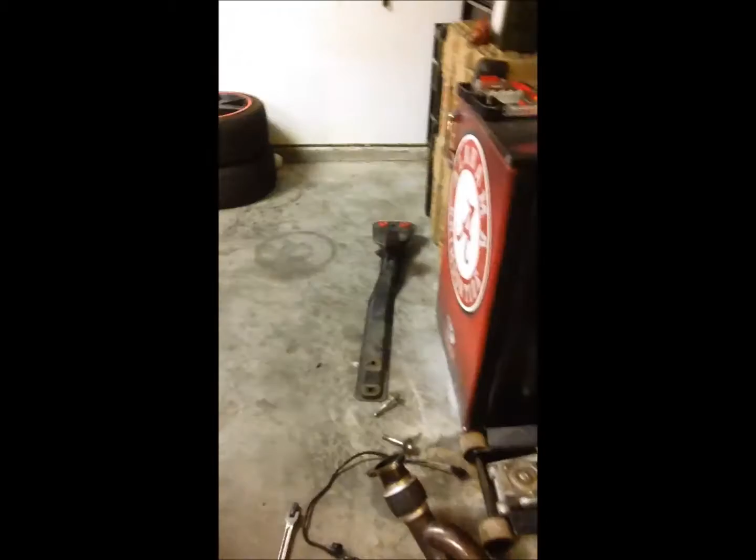This is assuming you already know how to remove that piece and your headers. I'm going to show you step by step what bolts to take out, what order, what tools you need, and this is all based on you doing it flying solo with no assistance.

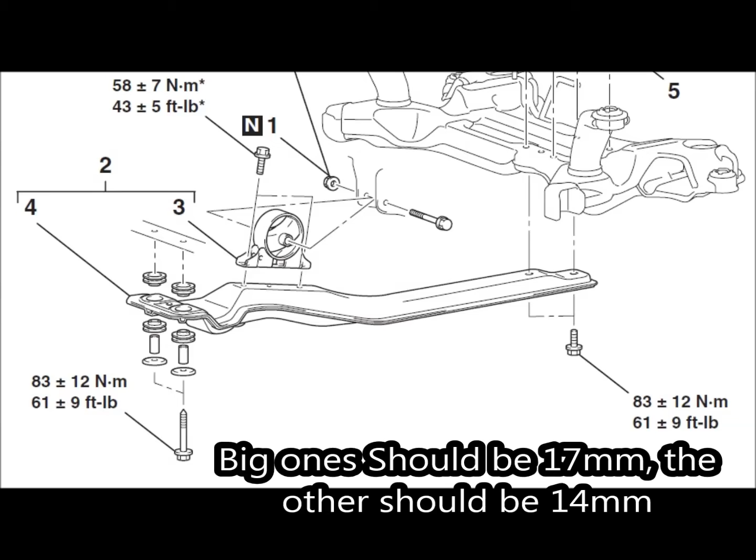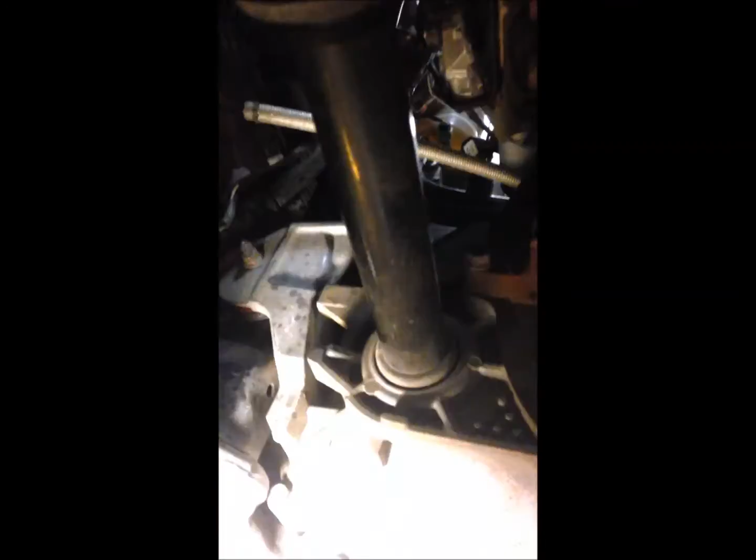So from this angle, my feet are pointed along with the driver's side hub assembly. And there's your ATX, oil pan, drive shaft, and your rear motor mount.

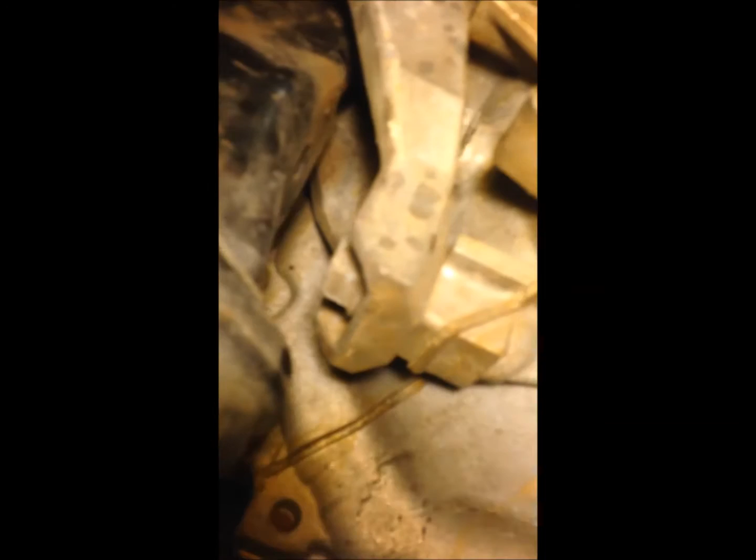Now the biggest pain is that guy right there. That bolt, because of the clearance, it's hard to get it out. Also, right there, back in there, there's a bolt that goes in there. That's also hard to get out.

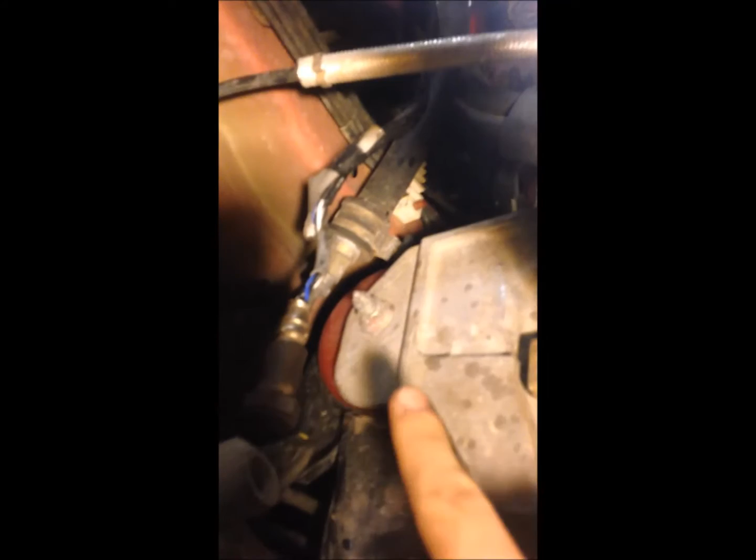So what we're going to do, we're going to remove that nut bolt combo, and with our other hand, we're going to push the transaxle, swinging it forward, because we already have our front mount removed.

Since we still have the transmission mount and the passenger side hydraulic mount installed, the engine will hang. It's not going to sag at all. It's actually pretty stout. I'll show you how to do that in a sec.

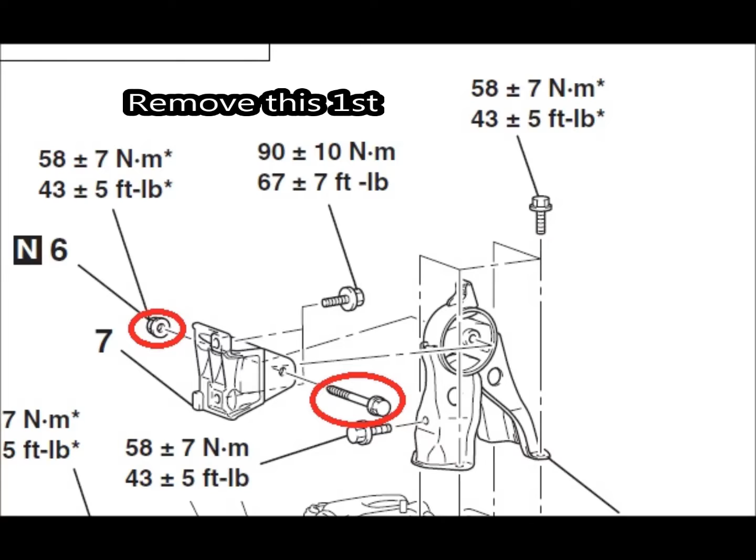So the motor mount bolt has been pulled out. I'm now going to show you how freely this setup swings.

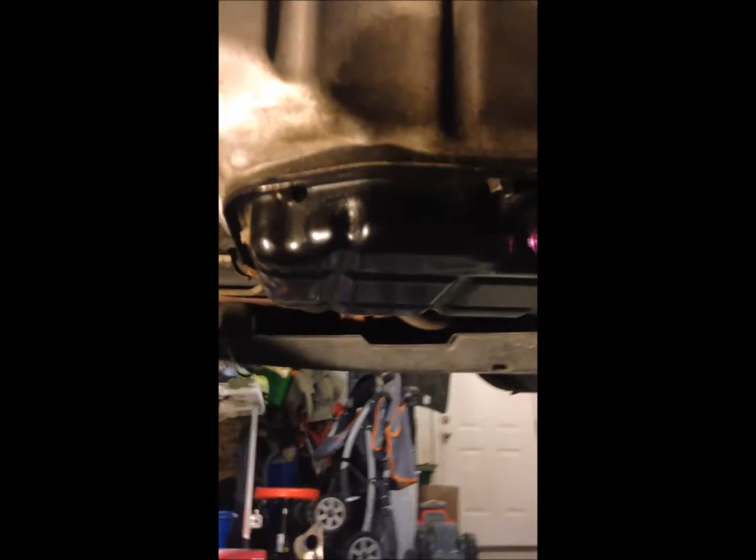Here's a better angle. A lot of movement, right?

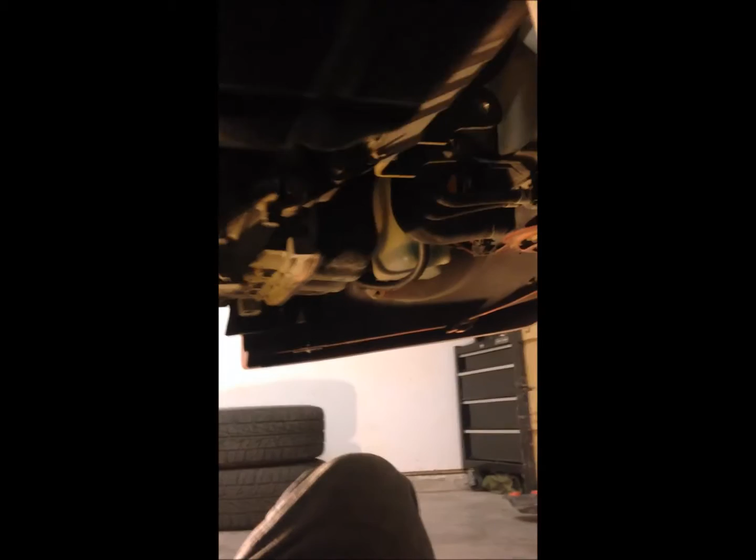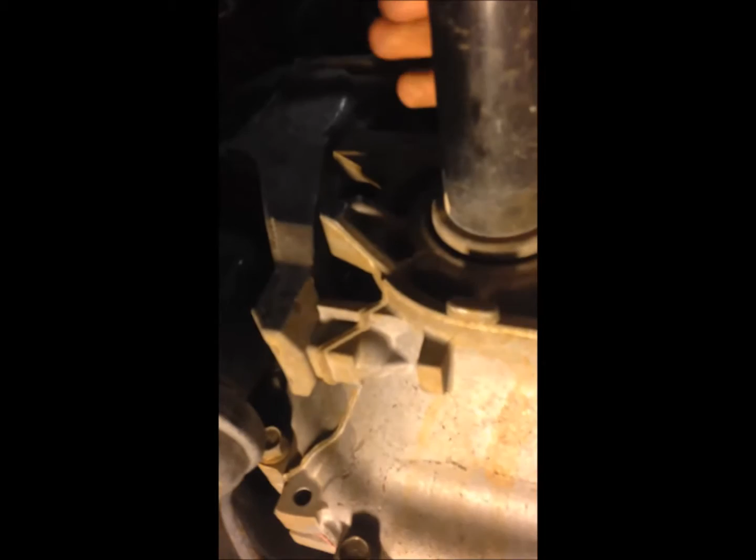So the theory behind pulling out that rear mount. Remember that bolt I was showing you is a pain? See all that room we got now? We pull it aside. You can hold it back, working a wrench back and forth, and pull it out.

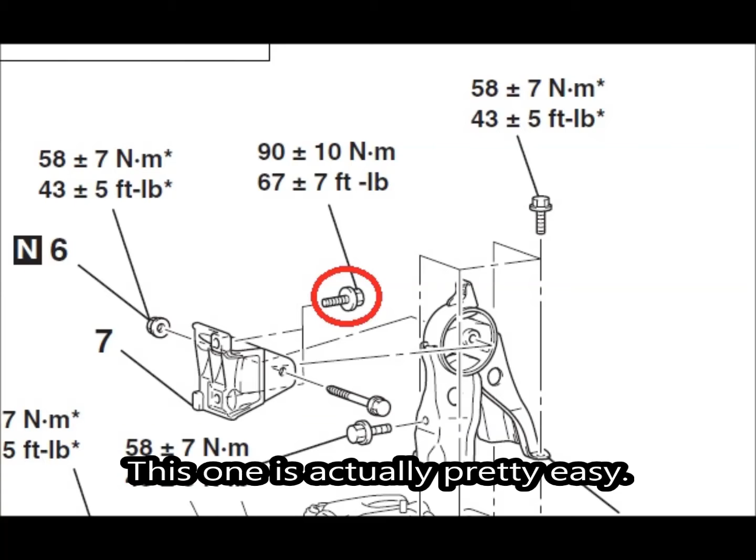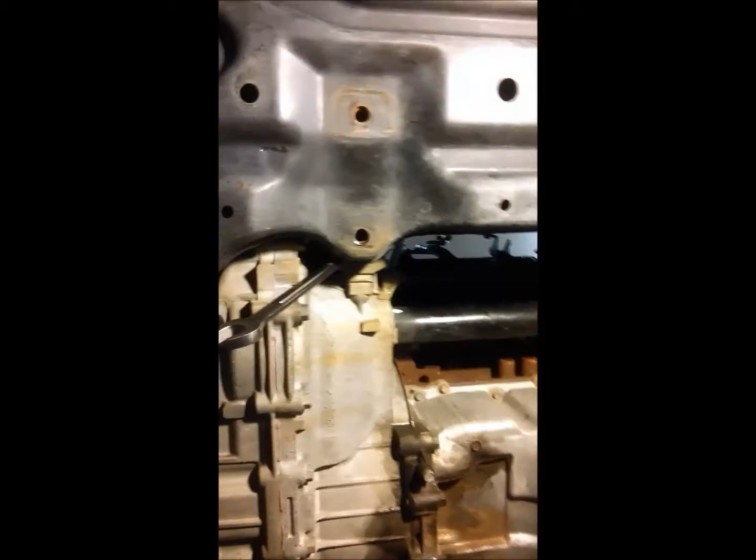I hope you can see what's going on here. There's my wrench, and there's the bolt we're trying to get to. Grab my half shaft, use your back muscles, and you're pulling it out and away.

That one's really stuck in there. Get you a cheater wrench. I've broken the torque on it.

Let's see if I can just work it out now.

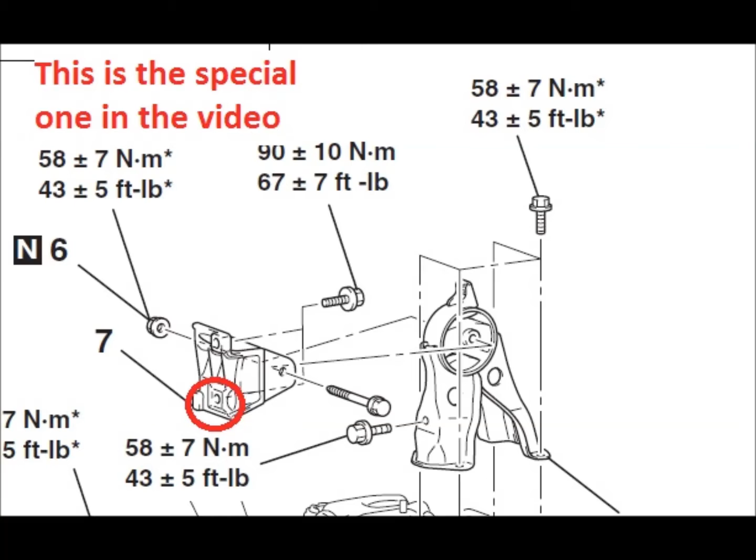Right now, there's no more room to pull it out. So all I'm doing is rocking the engine, giving me room to work it out. It's never going to come all the way out. When it comes time to pull this entire back member that bolts onto the transmission, that bolt is going to drop with it. It will not be fully removed.

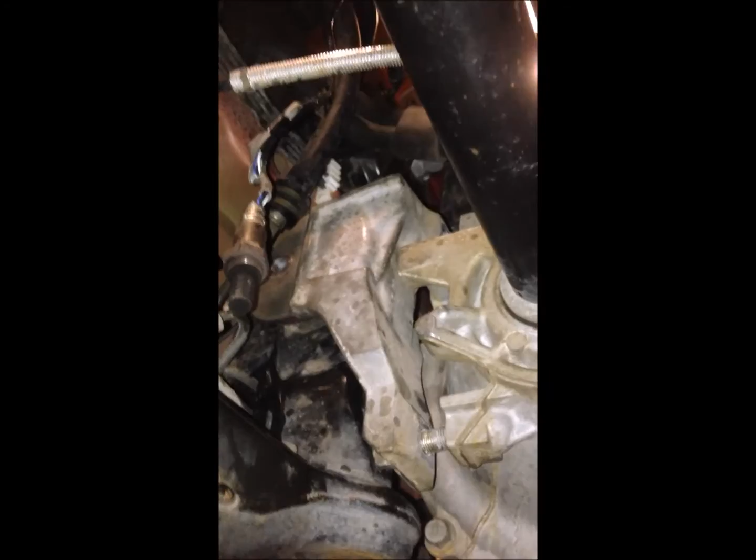Alright, so I took out that top bolt that I just showed you a picture of. This bolt is not fully removed. It's just chilling with that member. So I'm going to attempt to show you what to do. I only have two hands, one's got to hold the camera, so let's see how this goes.

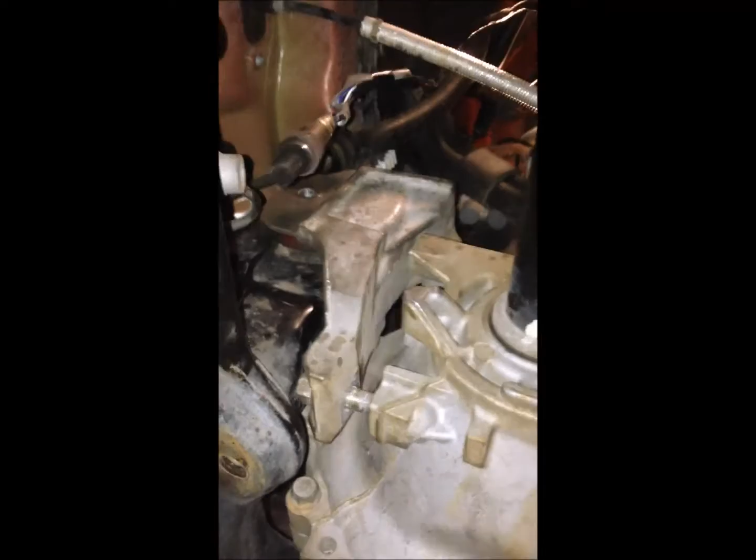As I'm using my left hand, I'm bracing it against the K-frame, and I'm just pretty much pulling the engine. See how that works? So try and get this camera so everyone can see, because this is the biggest pain in the butt.

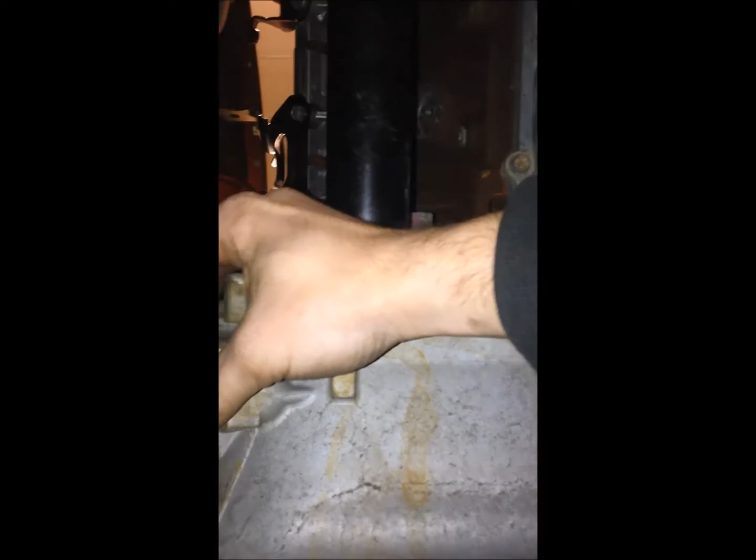All I'm doing, I don't know if you can see that or not, but all I'm doing is just working her up. I curl it with the left arm and just work her up out of the way. There you go.

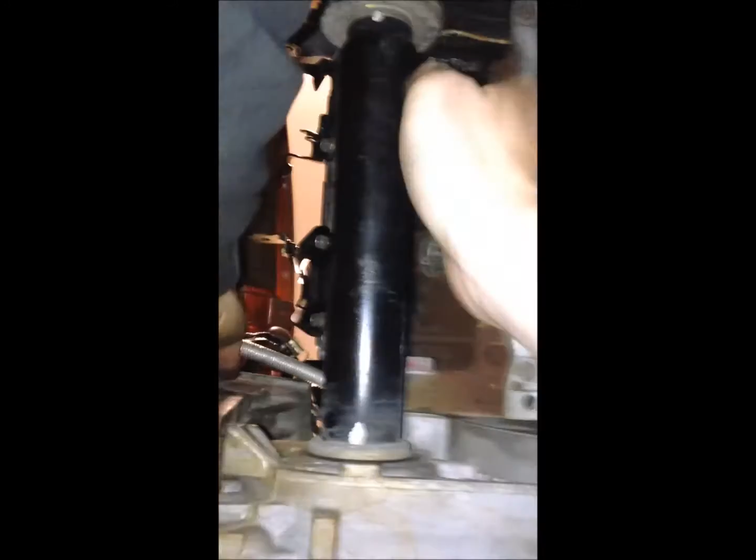So now that you have this back great piece of aluminum out of the way, now you have all the room to remove this bolt, this bolt, so you got that one and that one on the back side. You've got a bolt there, and you've got a bolt there. You no longer have to remove the K member.

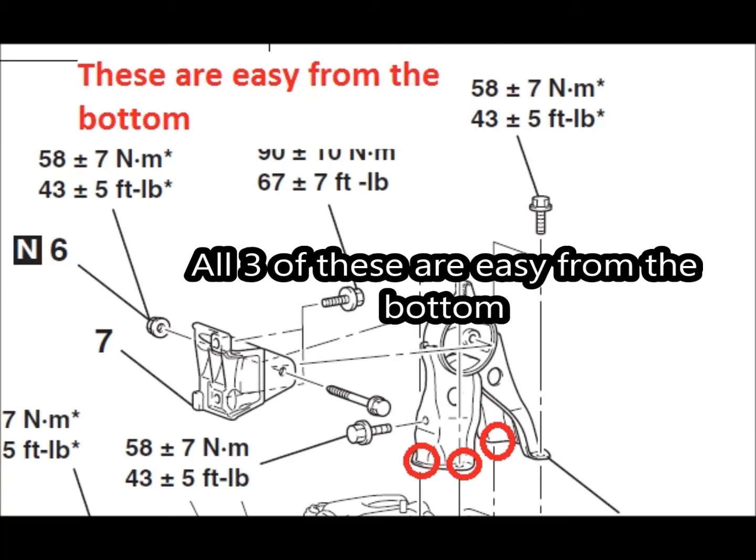Now these two are relatively easy to get to right here with just basic wrenches and or ratchets. The one that's trickiest is this one. There's no room for you to work a ratchet or wrench in here. So what you need to do is you need to have a good, I'd say, 2, maybe 3 feet worth of extensions.

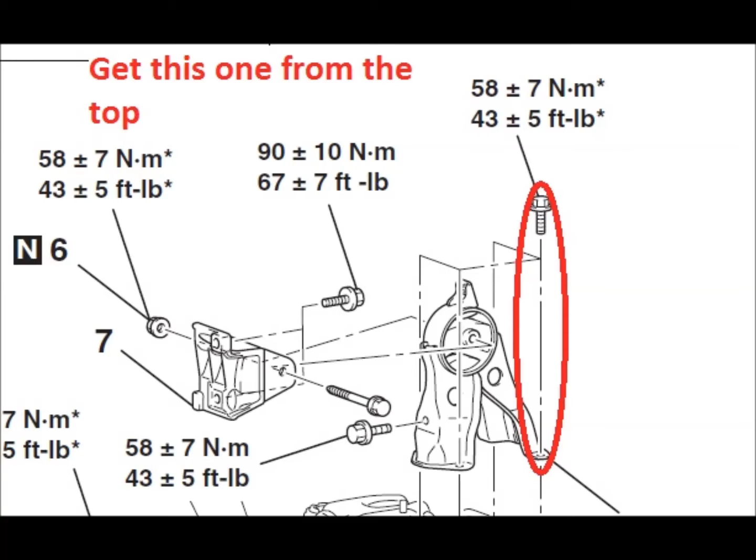Top view of your rear mount. You got the bolt right there. See if I can. Right there, where my shadow's hidden. That can be gotten from the bottom if you want, but I do it from the top.

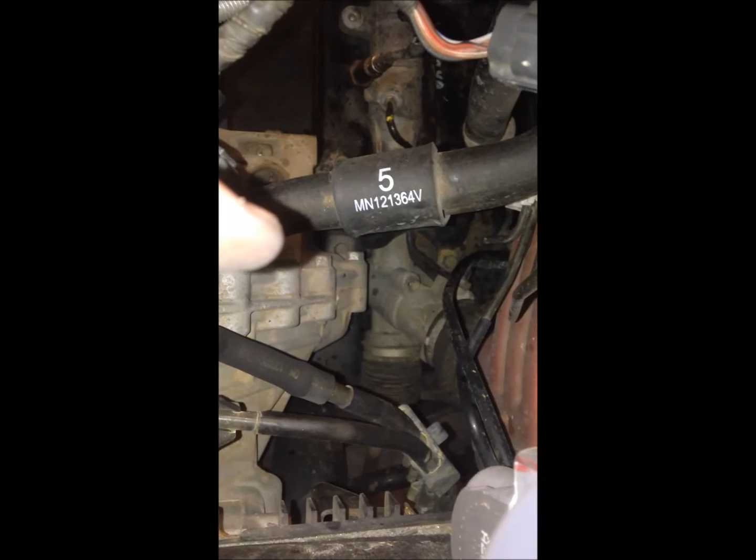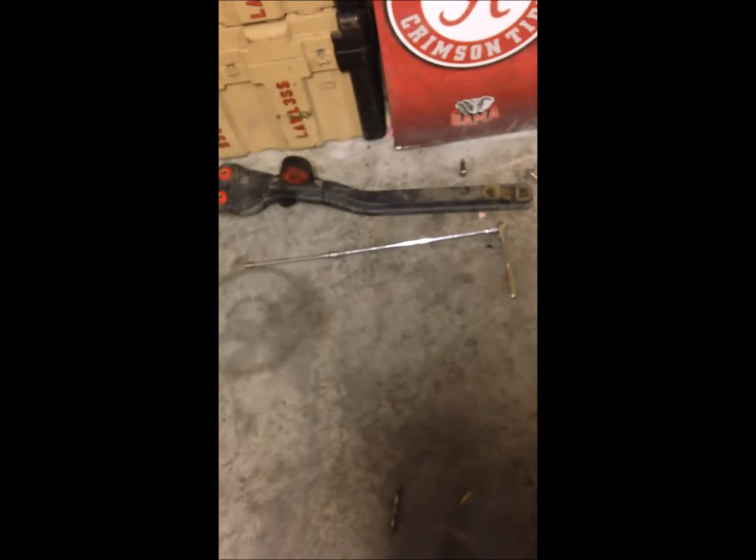We're already up here, the tricky one. Right there, where my shadow's hidden, that's the one that you got to get from up here. Using that half inch drive, long extension, adapter, 3/8 drive, long extension to a 14mm. That is your money maker.

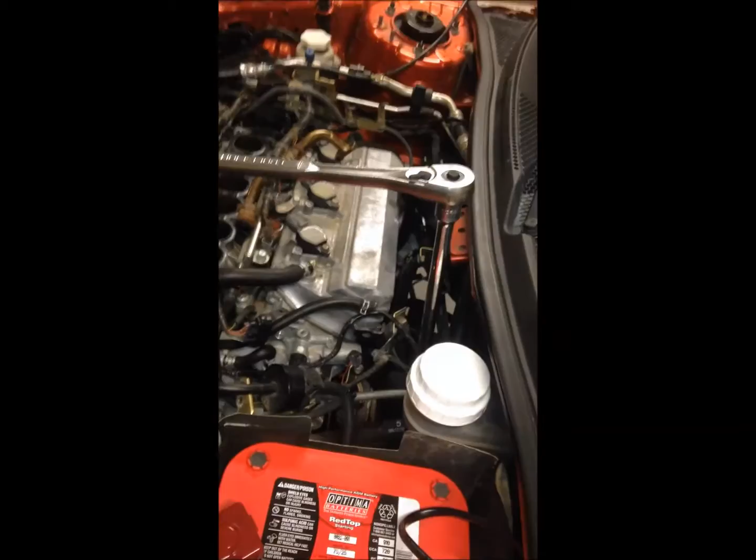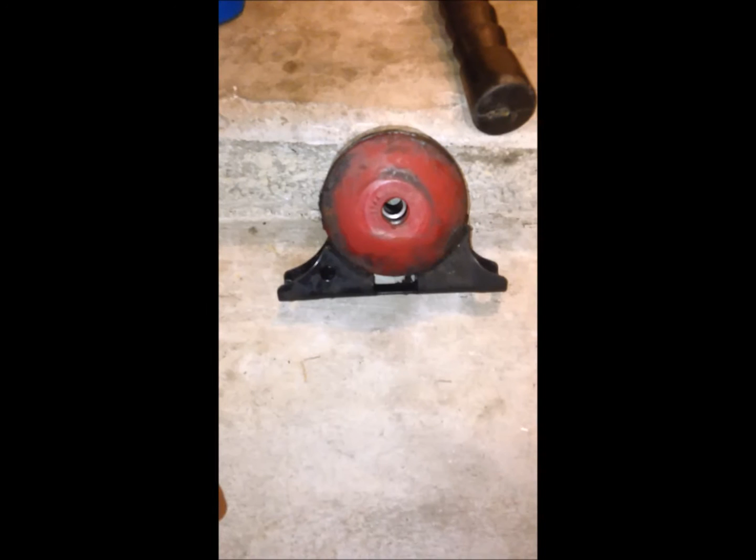Now, if you think I'm going to pull out my motor mount just to show you how to put it back in, you've lost your mind. But what I will do is show you what you need to accomplish the task.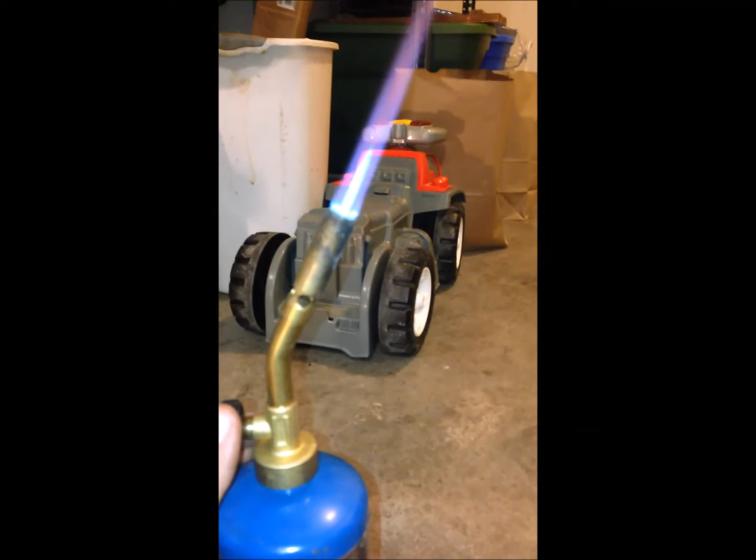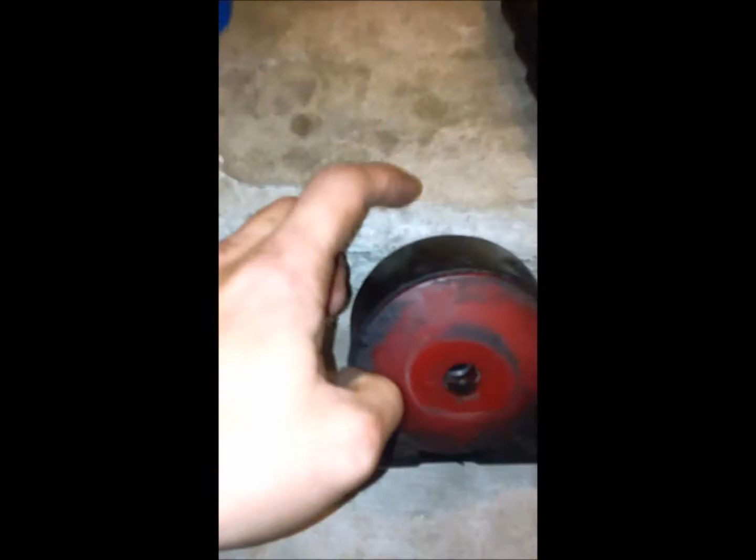Yeah, cooking with gas. You need one of these so you can burn it out. It takes some time, you're pretty much just cooking out the old mount. Eventually it becomes brittle and melted enough that you can push it out, work it out with screwdrivers, hammers, that kind of thing. You're definitely going to want a Dremel to clean up the inner side of the metal casing. Once you do that, it's all cleaned up, ready to rock and roll.

You take your new mount and you boil it. That's right, you boil it, for a good 15, 20 minutes. This will not melt, I promise you. And what's crazy is I got the idea from my wife. I couldn't figure out how to get it in there, even with grease, screwdrivers, mallets, and kicks. And she said, why don't you just warm it up, boil it, make it more pliable? I was like, oh my God, she's brilliant. So we boiled it for 20 minutes.

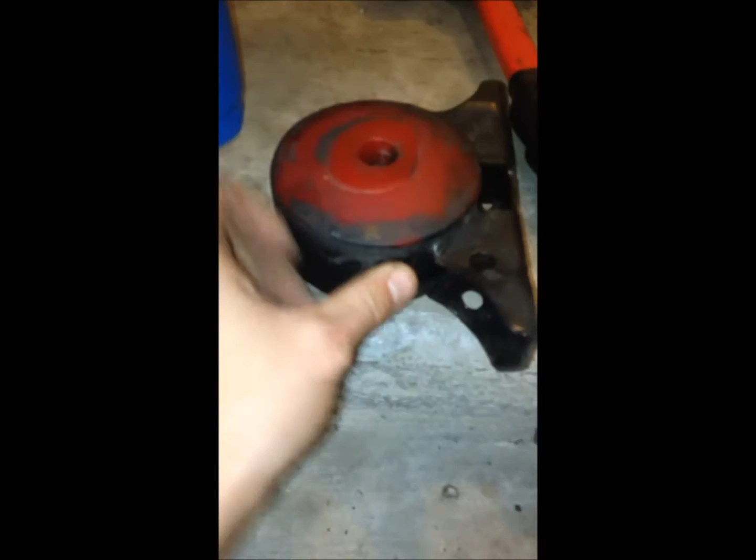You get it set on top of there, and with the grease already applied, this does require two people. One guy uses a screwdriver trying to work the lip in, because it's face down, while the other guy is either using a hammer or applying body weight, just literally pressing it in. You want to make sure you use a lot of lube.

Seriously, if my wife can figure out this idea, I'm sure you can too. It wasn't that hard, honestly. You just gotta have some patience.

You've removed your factory mounts, you've put in your new ones, now you're ready to install them, along with your long tube headers that you got from eBay or wherever. I got mine from eBay. I wanted long tubes, not shorties. Rip doesn't make them anymore, so OBX long tubes, this is your setup.

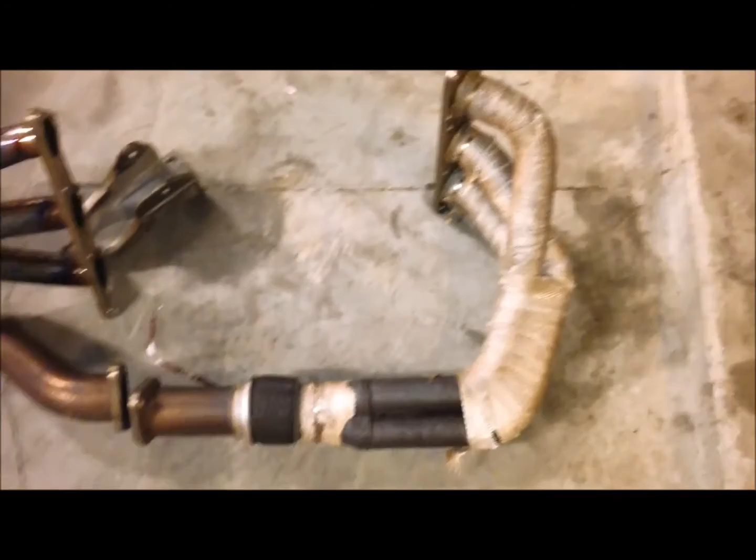I got my fronts wrapped already. It kind of fell off, just from doing some road racing, but that's not the point.

Alright, this is your setup in order of installation. Now there's one piece I'm missing, the test pipe that it came with. Mine's welded to the vehicle. I got a picture that I'll try to inject here real quick.

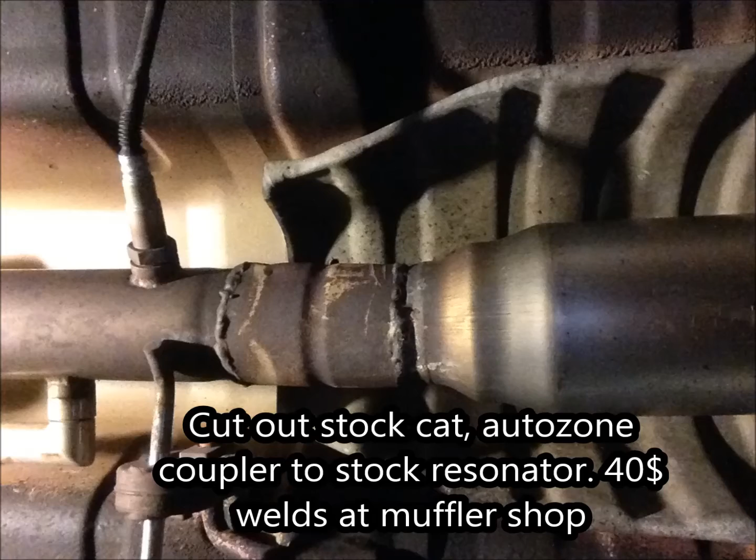Alright, that's how I got mine set up. So going back to video, you want to install your rear bank header first. You're going to install it up here at the flange, then put in your joining pipe. Then the front header last, because it's the easiest to do. If you put in the front first, you're going to have a pain in the ass time trying to get that other header in there.

So it's not going to be fully comprehensive, I'm sure you guys can figure out how to thread on the nut and the washer. But I am going to try to give you some tips on the best angle of attack, the best approach angle.

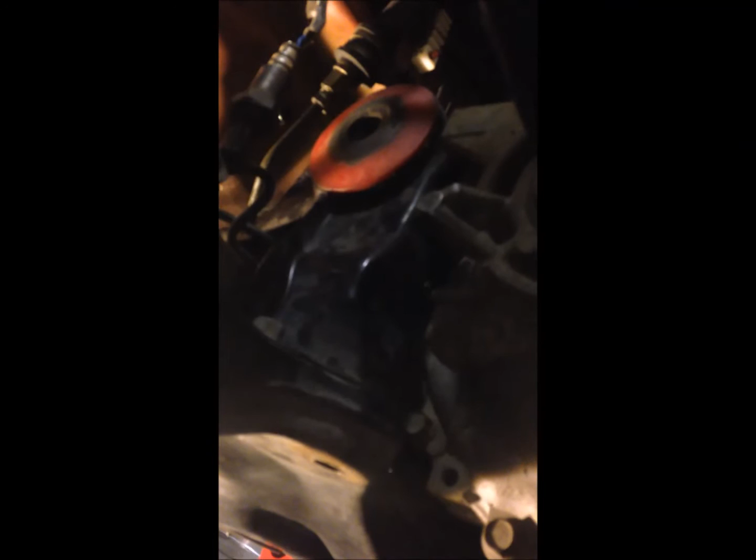You've already removed your rear mount. You followed my little tips on how to do the front, it's an identical thing. You boil it, grease it, force it. It fits, that's exactly the way I did it.

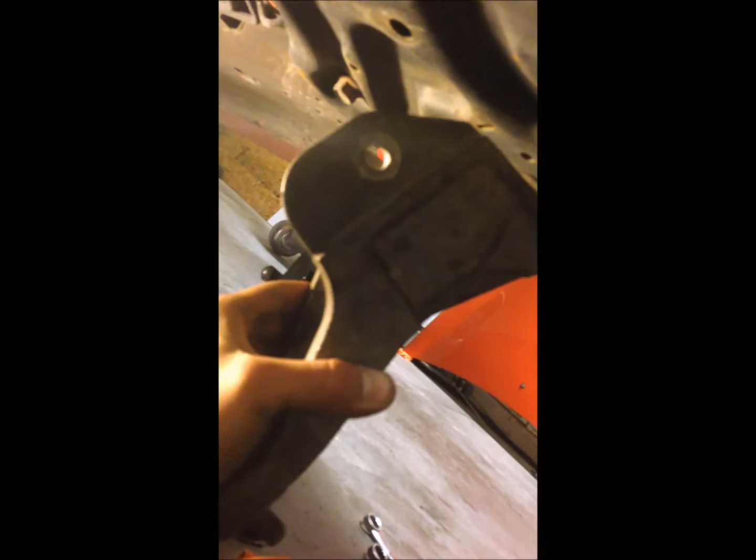We install this aluminum mount the exact same way I showed you to take it out, using the rock method. We rock the engine forward and finesse it in there. Remember, when installing this bracket for the motor mount at the transaxle, make sure that bolt is in there, because there isn't enough clearance between the transaxle and your K-member to thread that bolt in holding the bracket. It has to be installed as one unit.

Now you're ready to install your rear bank header. Now I did it with the O2 sensor already installed, but it's much easier to thread it into the header while it's removed. Because if you try to install the O2 sensor with the header already installed, your wires tend to creep up and wrap around themselves.

Yes, I know that's not perfect, it's not pretty, but it's a quick patch job for me. I had some issues, don't worry about that. Focus on the headers. Headers equal power.

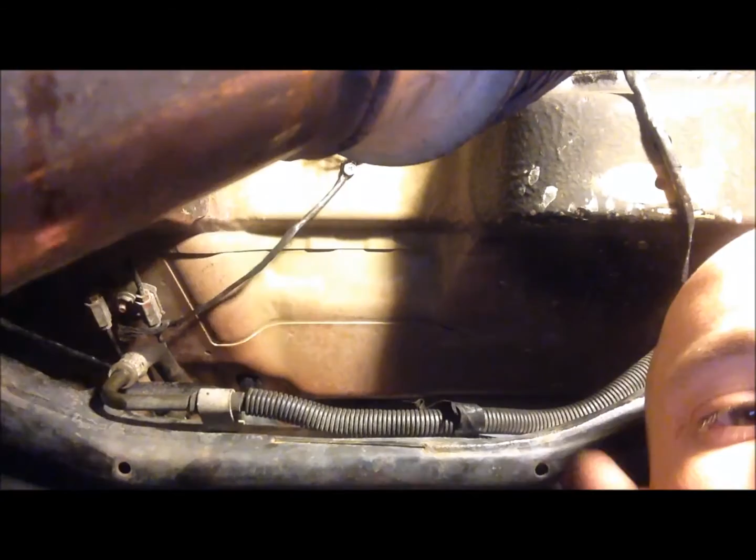I'm going to show you how to finesse this thing in here. This way is the front of the vehicle, that way is the rear. So you got your header, this is the flange that goes to your test pipe or exhaust, however you have it set up.

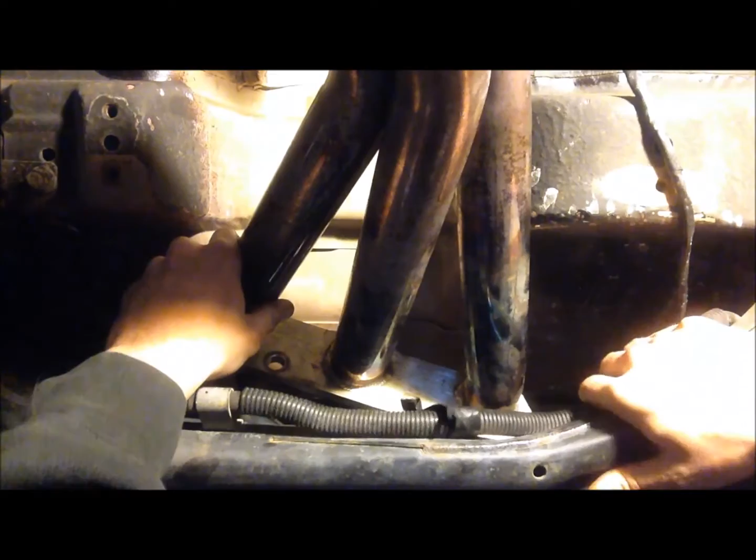Okay, to properly feed it, you're going to have to bring it up at an angle, working around your power steering rack and your sway bar. You just got to work her around. Eventually, you will get it all the way fed.

Once you get to about here, move the camera to right there. So now you're looking at the header coming over the K-member, going up to the rear bank.

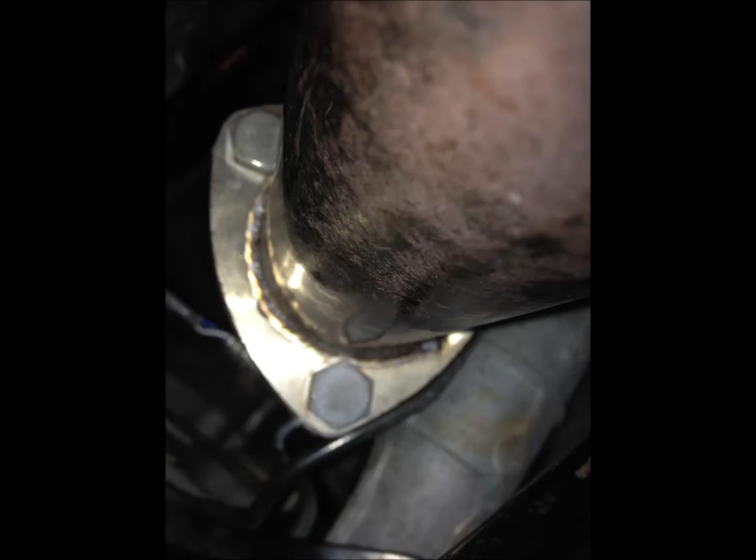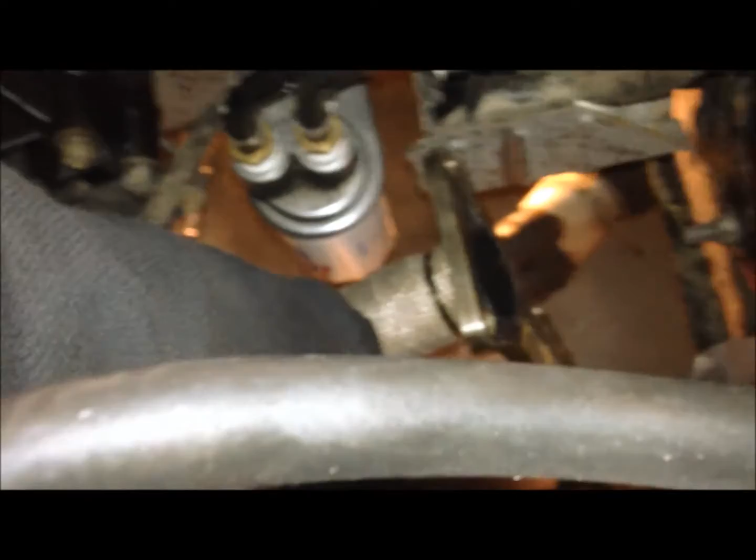You reach through the front, okay, and you're just gonna feed and massage the header up from the bottom. Now I have 2 extra hoses right there for my transmission filter, so you won't have that.

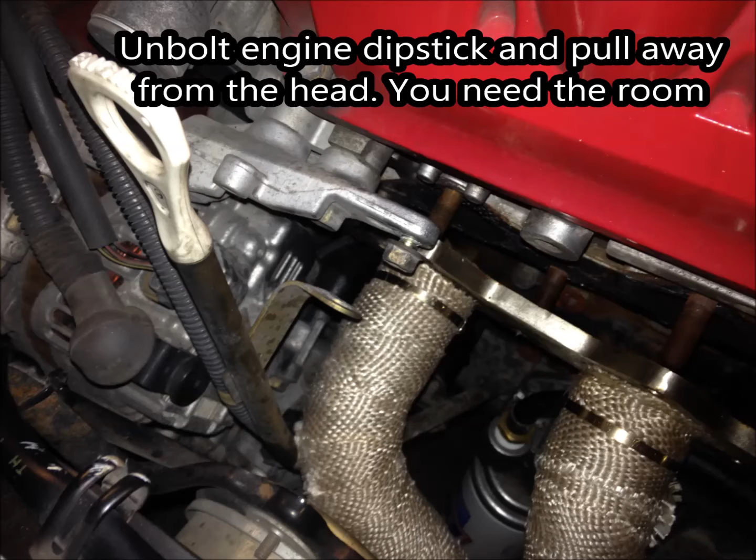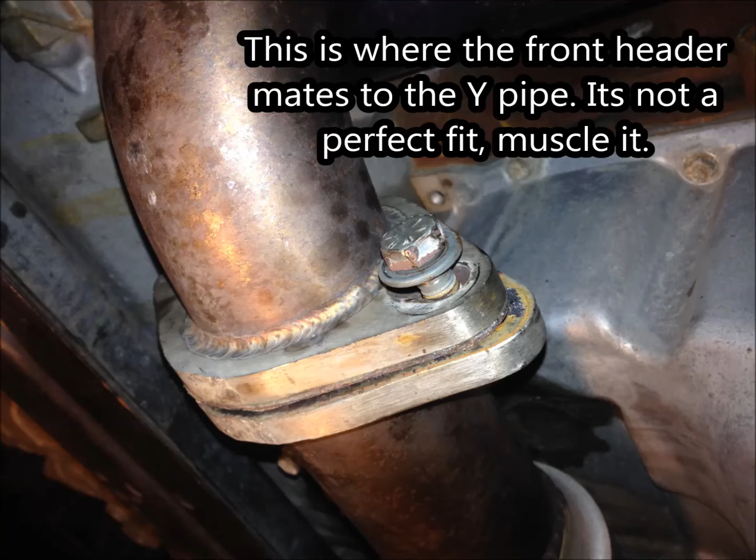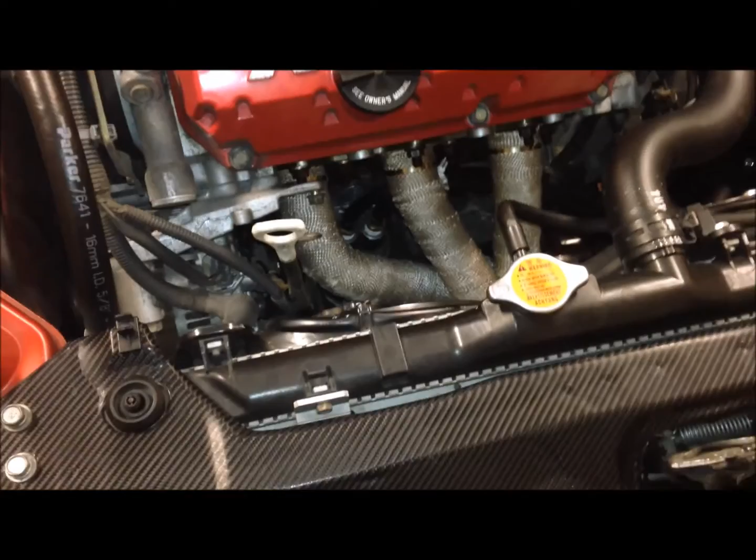Doing these headers, I'm sure by now you've figured out that you're going to have to extend your O2s. I'm not going to show you how to do that, but I'm going to give you some tips. When you go to cut the wires and extend them, you need to do that one wire at a time. That way you don't get it mixed up. If you get it mixed up, you start cross-doing circuits and shit just goes wrong, you get Christmas tree lights going on.

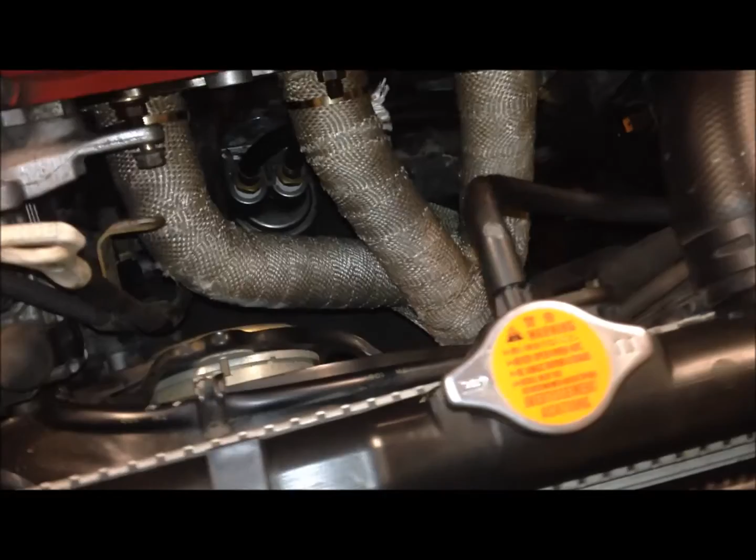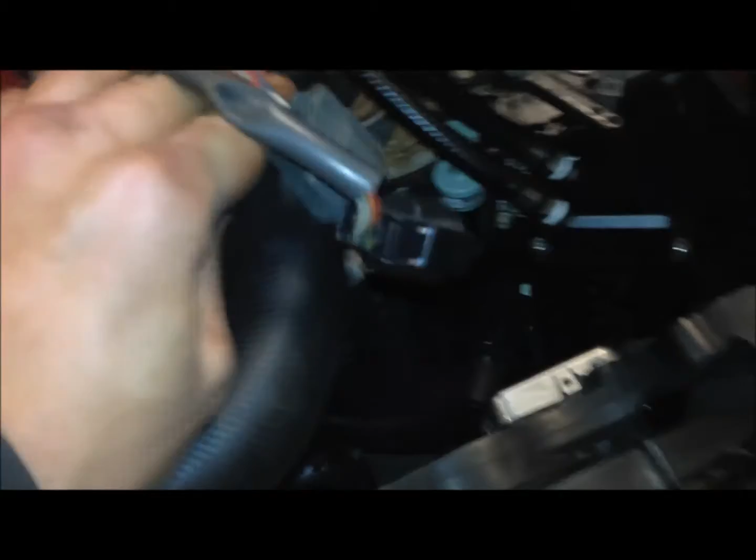So I'm going to show you the way I routed it, the way I piped my stuff. It's probably a better idea to actually splice the harness itself, not the sensor, so that way if you do have to replace it, you're not extending a whole sensor. But I did, because I wanted to maintain the factory locations. So there's my downstream for bank 2, and my upstream for bank 2.

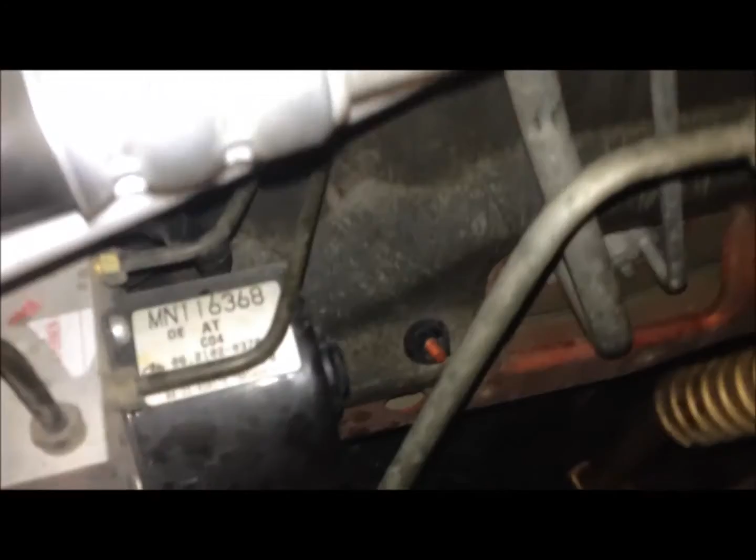Now how I routed these, okay, I piped it along in between the coolant lines, and it's actually, can't see it really, but I have it going all along the lower plenum. And then I have it cut down over an AC line behind the ABS motor down to the bottom. Twice I tried to just zip tie it to other things and it fell off and it would cook on the headers.

That's a bad day, that ruins everything. You start blowing engine fuses and strange things that make no sense start happening. So be beyond conservative when you go to route your O2 lines.

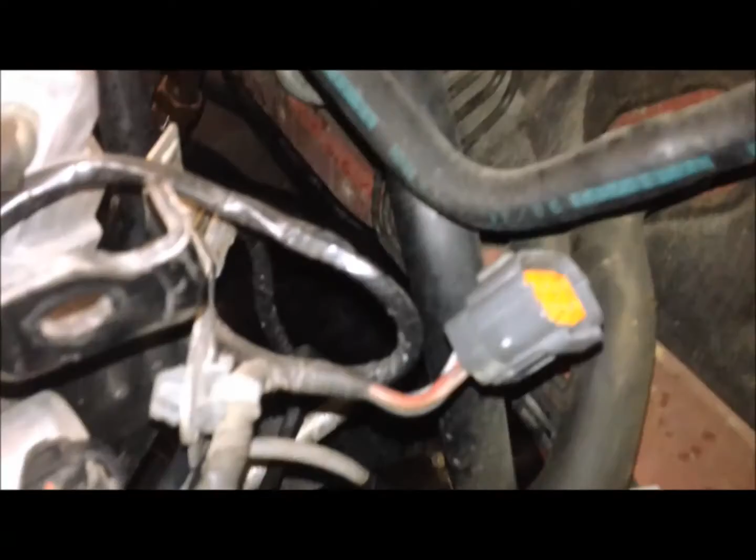If not, you're gonna have problems like I did. So both of these channels, okay, the one got routed to the left and down over top. The other one, I ran it underneath the factory harness. Comes around right here, and down there. Okay, my point being, find a way to tuck it so that way it's not just looking like a clusterfuck, but you need to be conservative in how you pipe and route it.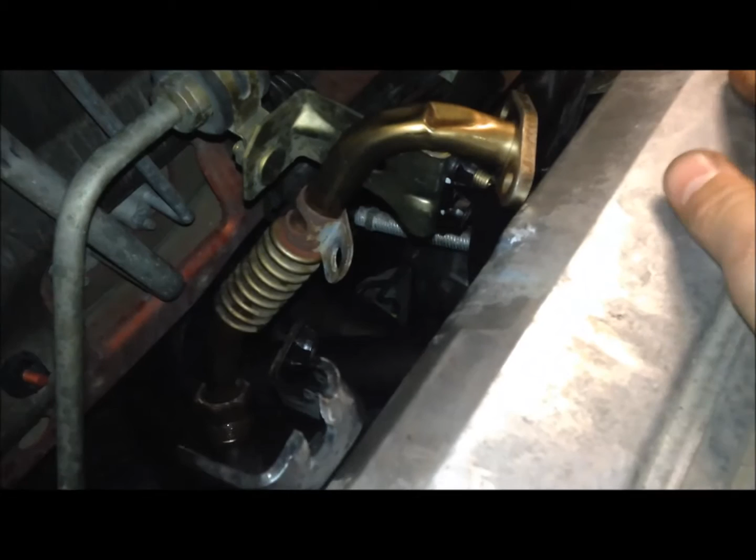You will be maintaining the use of your factory EGR. If you try to be slick and do an EGR delete, like you can get away with other cars, this one does not like it. You will lose power slightly, but you will lose a significant amount of gas mileage, and the computer's gonna freak out. Just keep it, okay?

You can see mine's dinged up. I stuck it in a vise to try to force it to mate with the intake manifold, because the angle of that bung for the EGR isn't anywhere near correct how it should be for placement.

I also have the intake manifold spacer from Outlaw Engineering back when they're still in business, so it's even more complicated. If you're just running the headers, you know, it's tricky to finagle it, but if you run both the headers and the manifold spacer, it is tricky. It definitely takes some caressing and manhandling.

Not only is the angle jacked up from the bung, but you're also adding about 1/4, 3/8 of an inch of lift on top of all the other geometry changes. So, good luck to you, figure it out.

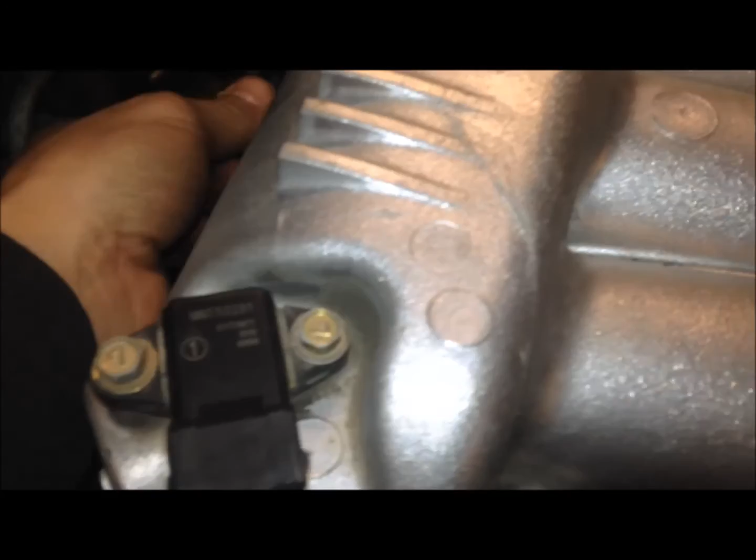While I'm here, now I know I just said figure it out, but I'm gonna give you some tricks. Per Outlaw Engineering instructions, they told us to go ahead, attach the EGR to the intake manifold, okay?

Yours will not be like this yet, but it will. Okay, you put it on as good as you can, thread on a couple nuts, all right, just enough to secure it, so that way it doesn't fall off.

Now, I don't like this idea. Ryan, hey, never mind, I have a 3-year-old, okay?

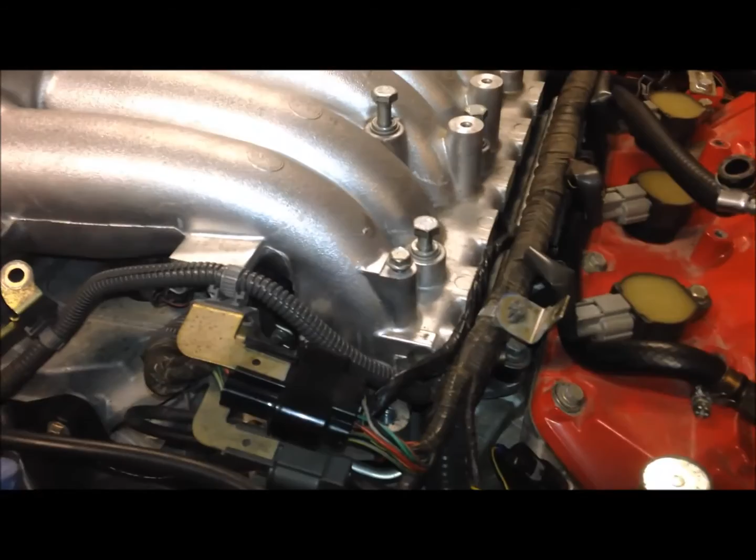They said to use the intake manifold bolts, because right now, the manifold is sitting like that, towards the back. They want you to use the bolts to pull it down, stretching the EGR. I don't like that, just because you're using aluminum to stretch hard steel.

I don't like it, but I was able to do it. It works, it does take some patience. Use a torque wrench. If you do not have a torque wrench, don't do this, because you will start pulling threads.